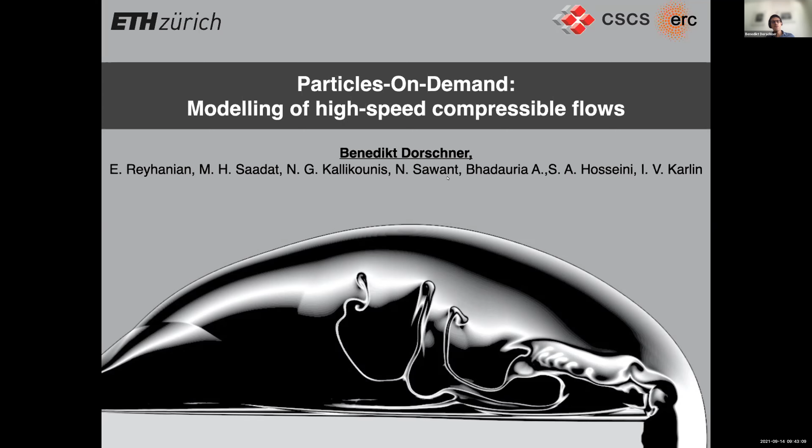So as you mentioned, today I want to talk to you a bit about how we can model high-speed compressible flows using particles on demand. This is under the scope of an ERC project led by Ilya. And what I will be showing you today is not just my work, but has been contributed by many PhD students, as listed here, also postdocs. Yeah. So let me start by giving you a bit of an overview.

I think we can now all agree that LBM really has developed into a versatile computational method, ranging from turbulent flows, where with the development of more sophisticated collision operators, we really were able to extend the range of attainable Reynolds numbers that we can look at and really have a predictive tool. The same applies in the multi-phase flow regime. I think there also LBM has really developed into a tool which can be used to not just validate, but also really understand and analyze complex flows.

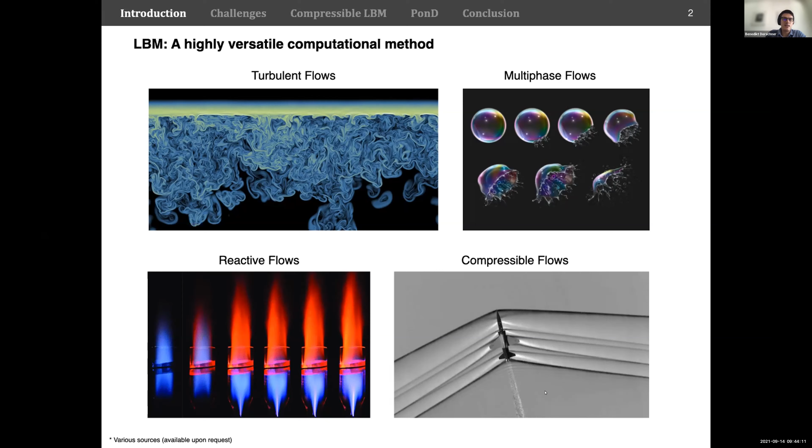Another area where I'm recently becoming interested is reactive flows, and also there I think we can make a valuable contribution. However, now the talk is about compressible flows, and I think particularly in recent years there's been a lot of developments in how we can use LBM also in this regime. And here I want to show you the range of Mach numbers by this arrow that you can see, and I think so far we have been conquering somehow the far left side. So we can do incompressible turbulence, and there's also scope for using LBM in the transonic regime and also in the supersonic regime, but this is still limited to the mild supersonic regime, so still quite low Mach numbers.

And today I wanted to talk to you basically about the full range of Mach numbers. And in particular, there's a lot of interest these days in hypersonic flight. So there we, of course, then need a tool to accurately predict hypersonic flow. This somewhere starts around Mach 5 and then leads to hypervelocity flow. And there's very interesting applications such as atmospheric re-entry, which ranges about Mach numbers 20, 30, something like that. But even further, if you go in Mach up to 1000 and beyond, you have interesting applications in astrophysics. So there's astrophysical jets that you want to predict numerically, understand and analyze.

But now let's talk a bit about the problem that we are having in really solving compressible high-speed flows. And this starts by looking at the Boltzmann equation in its continuous form. And here you can see it's continuous in velocity space, and we have our Maxwell-Boltzmann distribution function. We know that if we do a Chapman-Enskog analysis, we can recover the fully compressible Fourier-Navier-Stokes equations by considering these 5 moments that I'm showing here. So that is our conservation laws, the pressure tensor, heat flux tensor, and the 4th order moment that we need to consider in order to get the fully compressible Navier-Stokes equations.

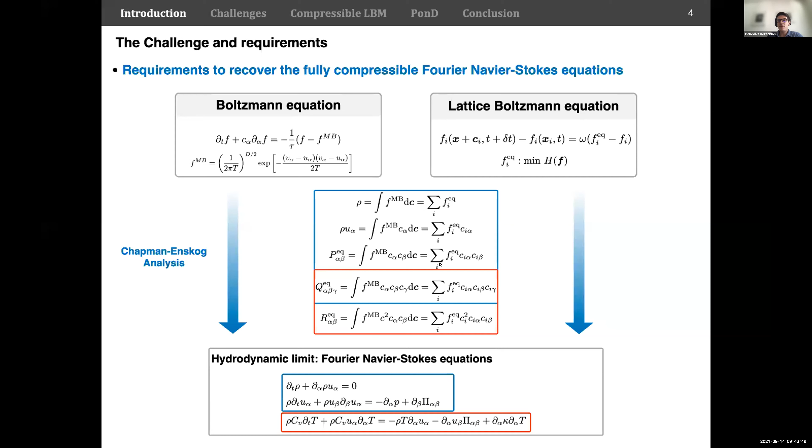Now that becomes a bit tricky if you look at the discrete setting, right? So this is the lattice Boltzmann equation, which can be viewed as a discrete version of the Boltzmann equation. So here we also discretize the velocity space, denoted by Ci, and then of course we also need to construct somehow a discrete version of the equilibrium distribution function. And the requirement to really get to the fully compressible Fourier-Navier-Stokes equations is that we have to recover these 5 moments correctly. And this becomes, of course, a bit tricky if you only have a finite set available. And it becomes clear if you already look at our standard lattices.

So here in one dimension is D1Q3. So this is a particle's velocity at rest, -1 and +1. And of course, if you go to higher dimensions, you can take the tensor product and you will end up with these lattices. But then, of course, if you take higher order moments, you can see that here, Ci cubed is going to be Ci. And this implies that the moments are going to be linearly dependent. Thus, we cannot capture all the moments that we previously said that we need to recover in order to go to high speed flows.

And you can somehow quantify this error that you're committing by looking at the deviations from the discrete moments to the continuous Maxwell-Boltzmann counterparts. Here I show some specific errors. They of course depend a bit on the choice of the equilibria, but the main structure remains very similar. In particular, you have these errors in the Q moment and in the R moment, or the 3rd order moment and the 4th order moment.

If you look now here, you have a term which is linear in the velocity and cubic in the velocity. Then you can say, okay, let's fix a temperature that will kill the linear term. So a fixed reference temperature here at 1/3 will nullify this term, but you're still left with a term which is cubic in velocity. And similar considerations also apply to the 4th order moment. And thus you can somehow say that these errors will only be negligible if you have vanishing flow velocity due to the cubic term here, and a fixed reference temperature T0.

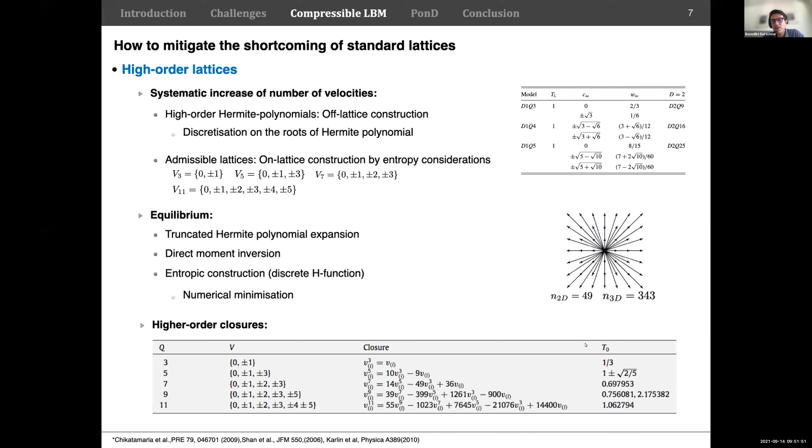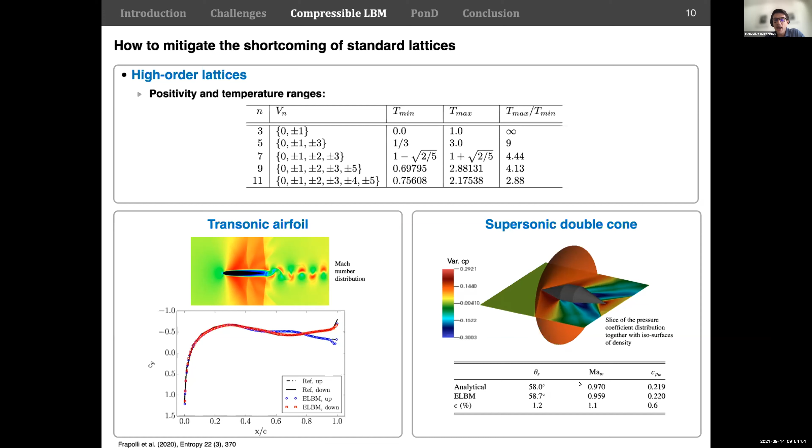He also did supersonic flow simulations, here shown exemplarily with this supersonic double cone. And again, we could compare it with an analytical solution. And you can see that even with quite coarse resolution, you were able to capture everything quite accurately within an error of 1%. So you can do something, but as I mentioned earlier, now we have to see what we can do.

So higher order lattices work. They can increase the range of attainable Mach number. It's a slow increase though. And actually the temperature range decreases with an increasing number of velocities. So that somehow questions if this alone is a path towards very large Mach numbers.

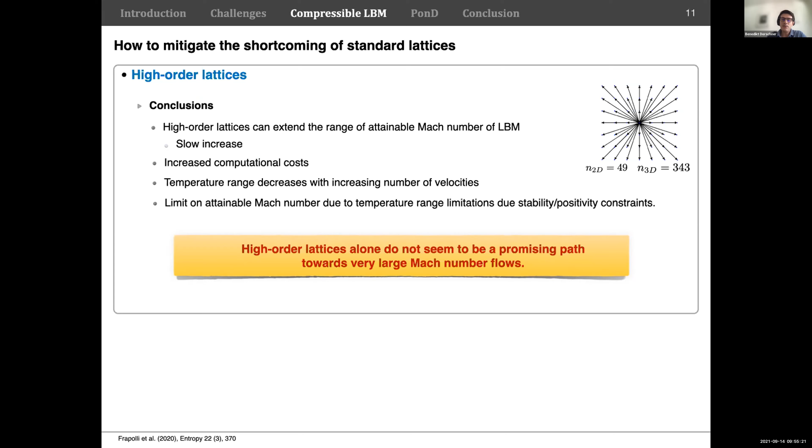Now, as I mentioned earlier, you can say, okay, let's ditch higher order lattices and let's stick to standard lattices and then correct the error terms in the hydrodynamic limit directly in the kinetic equations. And here I show you again the errors that we are committing, just to remind. And now we've been working on that, which is called an extended lattice Boltzmann method. And this is basically aiming to correct these errors.

So you can do this by realizing that you can actually correct these errors when you impose a different pressure tensor. And this is now not just the equilibrium pressure tensor that we usually have, but also takes into account the derivative of the deviation of the third order moment. And you can impose that by moment inversion is one way, or you can write it, as I show here, more compactly as a product form equilibrium, where it's a product of these triplets here. So that's one part for the third order moment.

You also have to look at the fourth order moment and the heat flux itself. And here you can also impose it directly, in the sense that here we look at the moments of the Maxwell-Boltzmann energy distribution functions, and use a second population in order to impose that. And here you can realize that you can generate these moments with these operators as shown here.

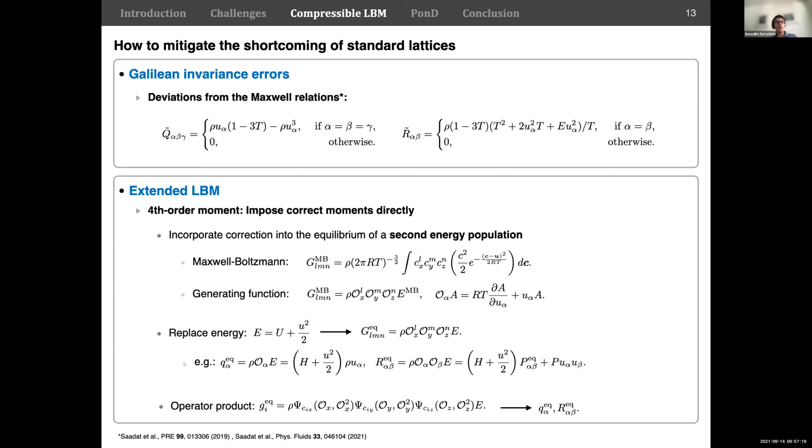Now, that this actually works. I want to show you very briefly a simulation of Hossein Saadat, who actually will have a talk later on and discuss this in a bit more detail. And this was the simulation of decaying, compressible, homogeneous isotropic turbulence. So Reynolds number is 175 and turbulent Mach of roughly

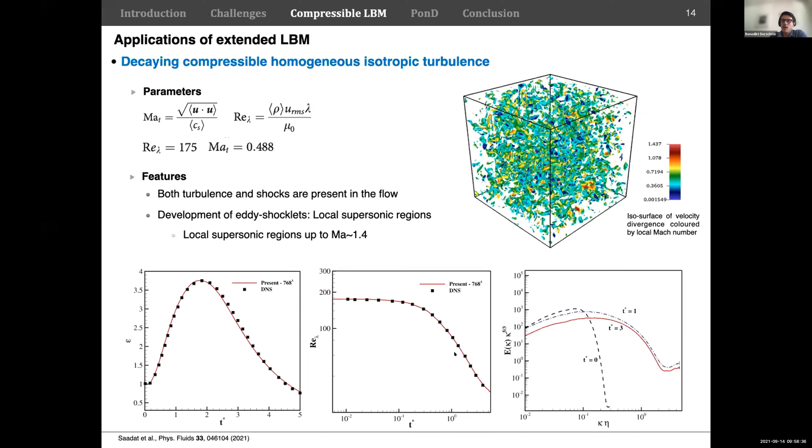Now, what I've shown you so far, these schemes are very comfortable in the regime that I've been showing previously. So this is in the range of transonic, mild supersonic flows. I promised you to go a bit further to look at the upper range, and for this, I will introduce particles on demand.

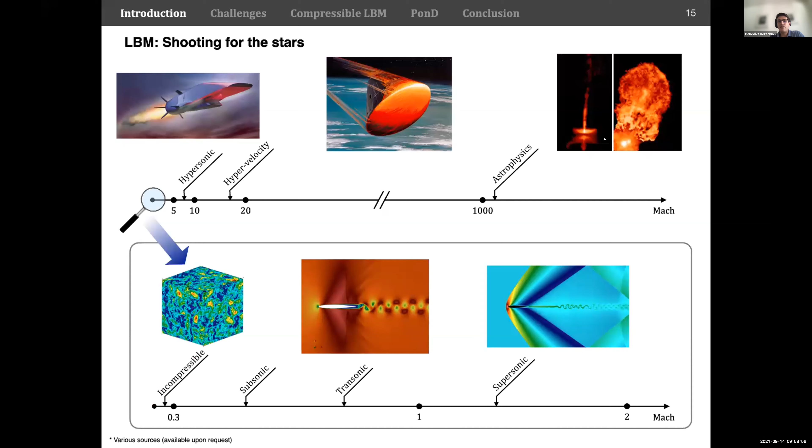That means what this local reference frame actually implies is that the populations only see macroscopic quantities with respect to the local gauge. That means your equilibrium, for example, will be evaluated at zero velocity and the reference temperature directly, basically leading to just a density dependence times the weights. And it also implies if you take the moments now with these scaled and shifted velocities with respect to some reference frame, you will actually recover all the moments that you need in order to recover fully compressible Navier-Stokes. So all the troubles that we had before will vanish once I'm in the local reference frame.

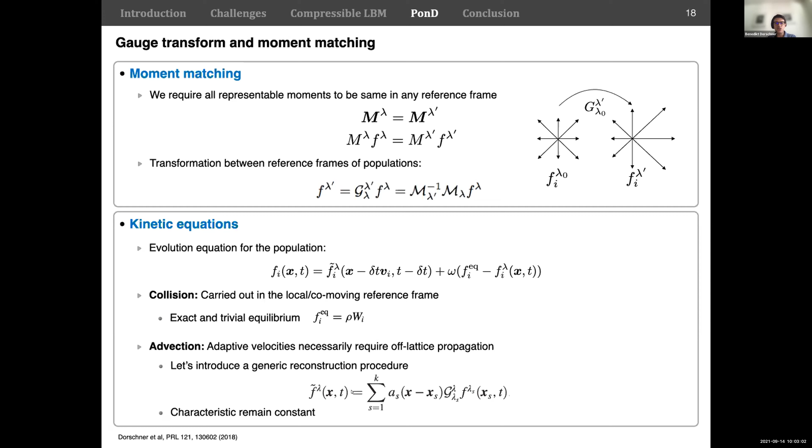So now the question is, how do we get this local reference frame? We know that once we are in the local reference frame, everything is well behaved and works well. The question is how to get there. And we get there by an iterative predictor-corrector search. Basically, we initialize the system with previous time step values.

We can thus compute our discrete velocities, do an off-lattice propagation of sorts, compute macroscopic fields, because they are now new, because you have distributed your mass, momentum, energy, and so on, which then necessarily leads to a new reference frame. And then you have to check if you have converged, and by converged I mean, did the reference frame change? If it has changed, you keep iterating until it converges.

And once it converges, you're actually in the local reference frame, and you can carry out your collision and the next time step. Here's a note on the convergence of this whole thing. It's a fast convergence in the sense that typically we don't require much more than one iteration in regions where you have smooth flow, and only in regions where you have large gradients, discontinuities, will you have iterations which go beyond one. But still small, they range between 4, 5, 6, something around that.

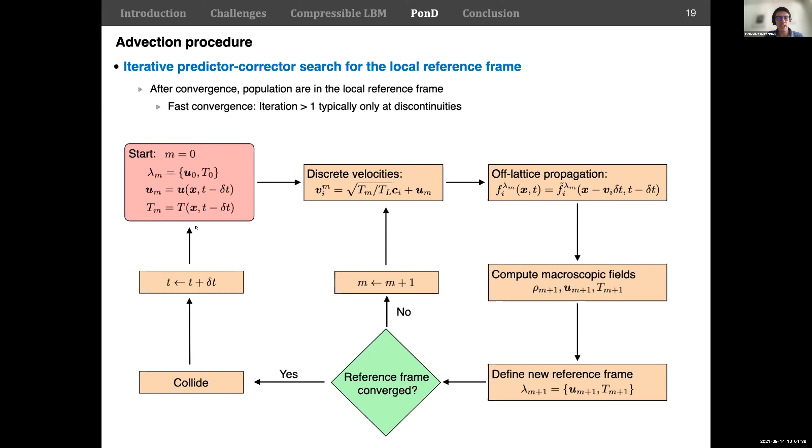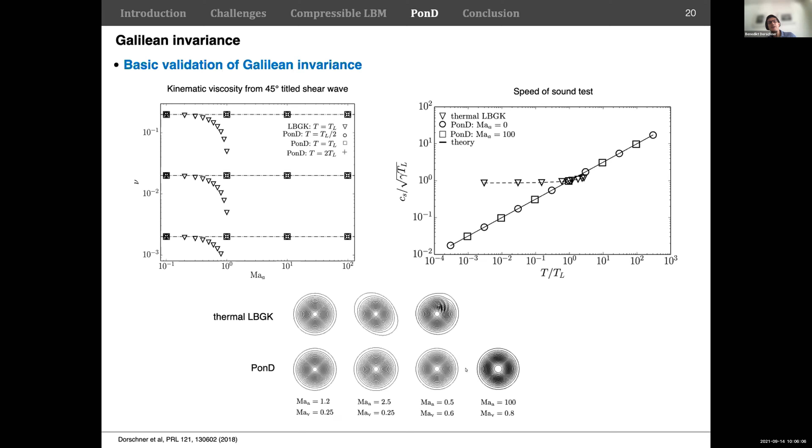Previously, I was a bit vague about the choice of the off-lattice propagation scheme. And that was for a reason, because there are many different methods that you can use, and you can more or less generically incorporate POND in them. Previously, we've been using a semi-Lagrangian advection scheme, which works, but also has some drawbacks, especially if you use Lagrange polynomials or something like that. I encourage you to check out Nikos Kallikounis' talk. He will talk about finite volume schemes, where the main benefit is that you rigorously conserve mass. And on the plus side, of course, you can get away with far fewer velocities.

But you can also use finite difference schemes. You can use hybrid schemes, LBM-POND. You can snap them onto the lattice if the flow actually allows that. There are also other approximate versions like regularizations and so on. In terms of the reconstructions themselves, we've also been playing with moment-conserving interpolations that we borrowed from the vortex particle community, but also higher-order WENO schemes, limiters, and so on. Those really help if you go to large Mach numbers with a strong discontinuity. And for those schemes, Ehsan will also talk, I think in the next talk, a bit more in detail on the numerics.

Okay, so now one other thing to note is that Pond is quite universal in the sense that we can use all the different models that we have already developed in LBM within Pond. So we can use our two-population models, quasi-equilibrium models. You can also use your favorite multi-phase model, multi-speed models for non-equilibrium flows, and even detonation simulations are now possible.

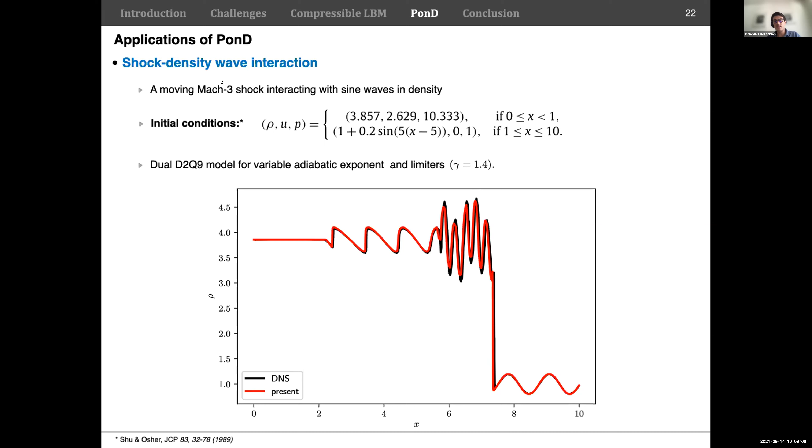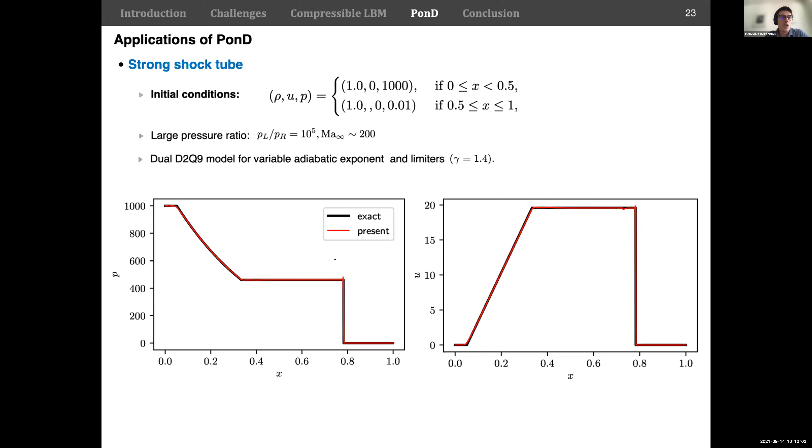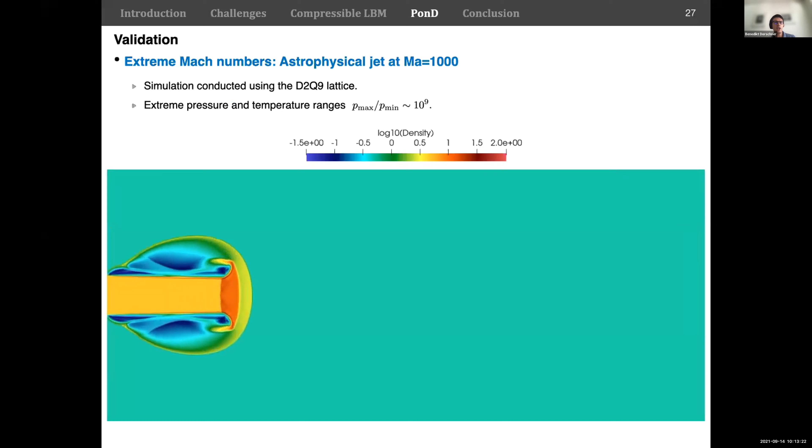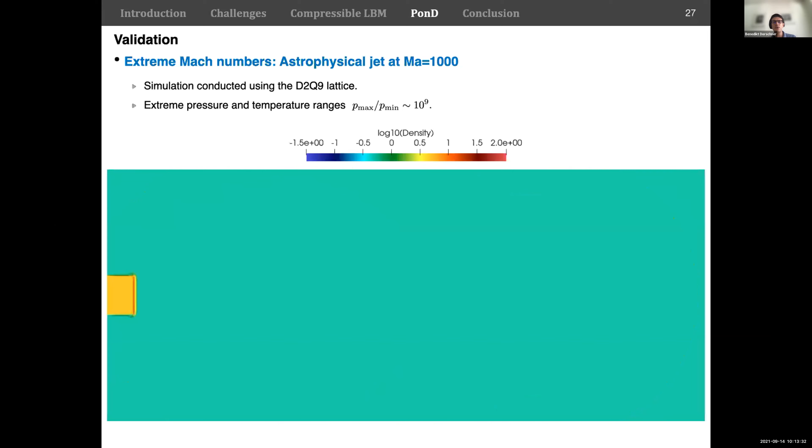Last but not least, I promised you the full range, and here I want to show you an astrophysical jet at a very large Mach number. So you have a jet which comes in at Mach number 1000. And this was a simulation still using 9 speeds and 2 populations. It's extreme in the sense that you have an extreme pressure ratio. So the ratio goes up to 9 orders of magnitude difference in both pressure and also temperature.

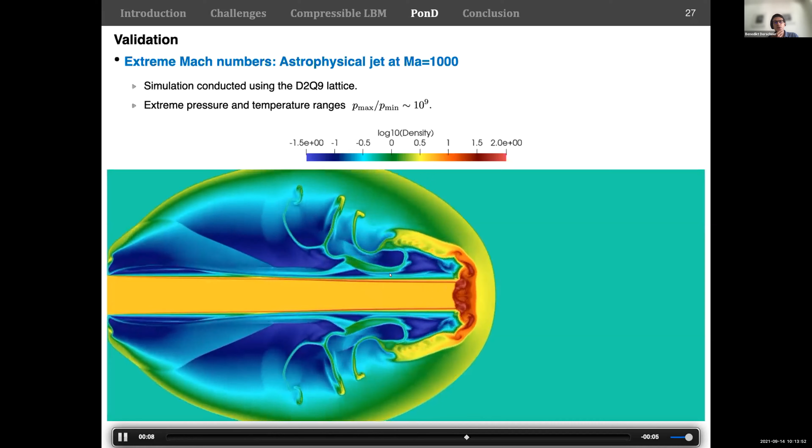And here in this movie, I show you the evolution of the logarithmic density. I will not go too much in detail there. I think Esan will talk a bit more about what you can actually see here. But this is just to say that Pond also works for extreme Mach number flows.

That comes to the end of my talk now. So what I was trying to convey today is a couple of ways how you can do compressible flows with LBM or kinetic schemes in general. If you look at higher order lattices, correction models, they are very accurate, very efficient, but they're somehow limited in the range they can achieve. So you are somehow on the low Mach number end of the spectrum. And you can use Pond to eliminate these Galilean invariants and actually capture the full range in Mach numbers.

And this, of course, opens up very interesting perspectives. We can now look at things like atmospheric reentry problems. Of course, we still have a lot to do in order to capture those accurately, but at least there's a path towards this now. Also interesting applications like the supersonic parachutes that you will find for Mars landings, for example. This is something which interests me at the moment, in particular because we can now use all the knowledge that we already have from the lattice Boltzmann in terms of fluid structure interaction and so on directly in Pond, and then basically tackle these types of applications with that.

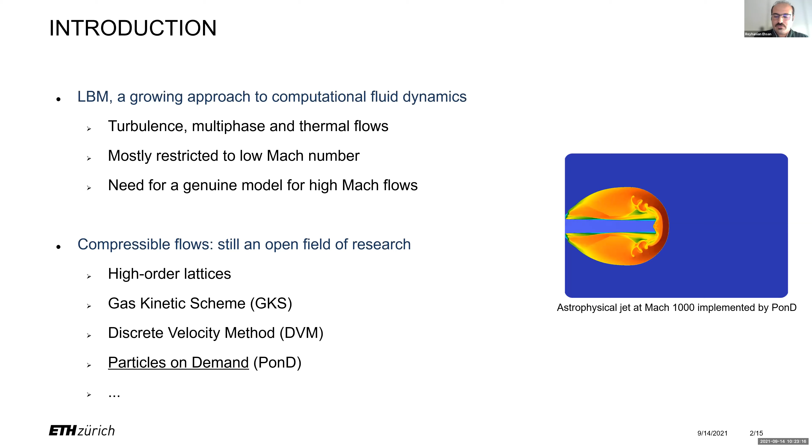Within the framework of kinetic theory, there have been some methods developed so far, all with some advantages and disadvantages of their own. But as a recent and novel method, I have chosen the particles on demand method for my research. And today I would like to show some applications of particles on demand on high Mach number flows. We had a very comprehensive talk on the introduction of PonD, but a very brief introduction on my side.

In the PonD framework, the conventional discrete velocities known as the lattice are rescaled with the square root of the local temperature of the flow. And this will get rid of the temperature restriction that we have in LBM. And then those velocities are shifted by the local velocity of the flow. And this will bring us the Galilean invariance that we are missing in lattice Boltzmann methods.

Usually in lattice Boltzmann methods, one way to get the equilibrium is to use the truncated polynomial in velocity, and that is the main reason that these schemes are not Galilean invariant. But here we have an exact equilibrium depending only on the density and the weights, and this will bring us an error-free collision. We also realize that the PonD scheme reduces to lattice Boltzmann if the temperature is chosen as the lattice temperature, and if the global reference frame is set to 0.

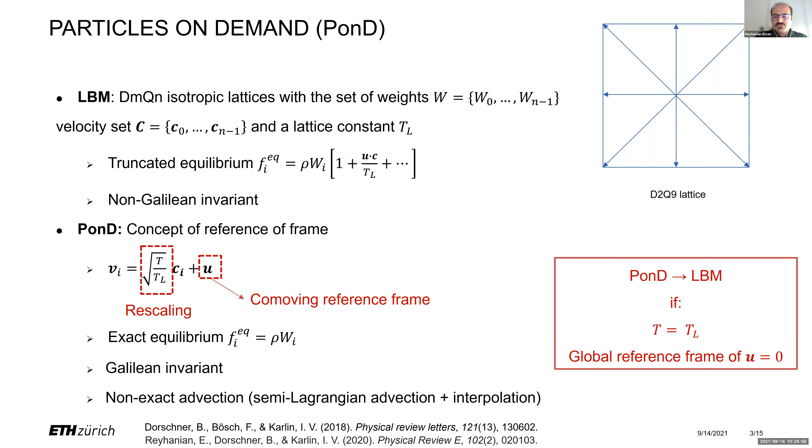However, these discrete velocities are no longer integers and space-filling, so the simple point-to-point streaming that we have in lattice Boltzmann is no longer the case here, and we have to use different methods. For example, I use the semi-Lagrangian advection, which requires interpolation. If we want to update the information at the monitoring point X, we travel back in time through the characteristics to the departure point, and this departure point will not necessarily be a node point. So some collocation points will be used to interpolate for the desired information.

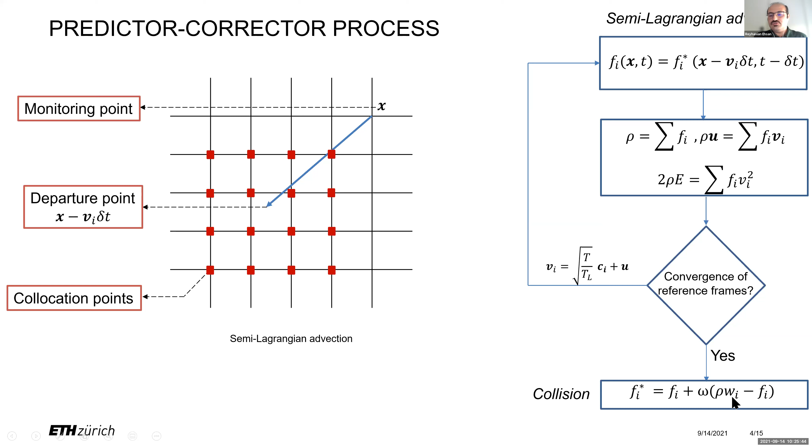After that, the macroscopic values will be evaluated, and we iterate this process until the convergence of reference frames is achieved. And at that point, we are sure that we are at the co-moving reference frame where we can use the exact equilibrium function in the collision.

And this is the big picture. Now we want to go into the little details as to how we can do all these reconstructions and how they would affect our simulation.

So the reconstruction is simply the interpolation of the transformed particles. We want to transform the populations before advecting them in order to be consistent. So they must be transformed to the reference frame of the monitoring point that we want to advect these particles to. So after transforming those, we want to interpolate these transformed particles on all these collocation points.

And for the interpolation kernel, there are different choices in the literature which have been extensively used before. For example, one can use a moment conserving interpolation, where a finite number of moments of the interpolated quantity is conserved during this interpolation. One can use the simple classic Lagrange polynomials, which can overlap with this moment conserving one under some circumstances. And also we have B-splines, which are smooth functions, and so on. So there are so many choices.

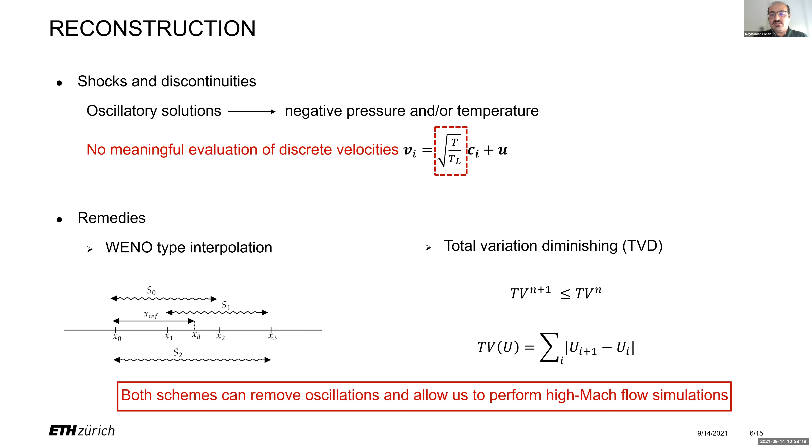So to overcome that, we use two types of remedies. One is the WENO interpolation, where we choose between the sub-stencils. And the other one is to use the total variation diminishing concept, where the total variation of the solution remains finite and not increasing in time.

So the WENO scheme is very well-known, but just a brief introduction: the main stencil is broken into different sub-stencils, each assigned a weight. If a sub-stencil includes a discontinuity, then the weight of that sub-stencil is negligible. And finally, the convex combination of solutions at each of the sub-stencils guarantees an oscillationless final solution. This is one way that we can deal with shocks and discontinuities.

The other way that we have used is the concept of TVD, and we apply that to an improved, well-known B-spline known as the K3 B-spline. All B-splines are second-order accurate, but we can improve those and have third-order accuracy. And as I said before, B-splines are smooth functions. They have a continuous derivative.

For example, if we compare this B-spline to the fourth-order Lagrange polynomial, you can see its smoothness and continuous derivative in its range. And this brings us a very good mass-conserving property, as we can see in our simulations. So with that in mind, we apply TVD on top of this interpolation kernel to have oscillationless solutions, because as we can see here, we still have negative values, which will lead to oscillatory solutions.

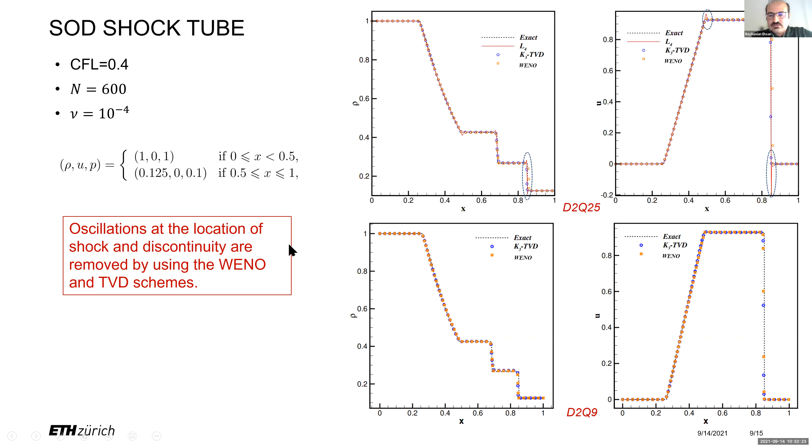And the same explanation goes for the non-velocities as well, where we see that oscillations have been removed from these plots. So I go a little bit further. I show the Lax shock tube problem. The CFL is the same number, 0.4, even though I have compared with lower CFL numbers. So for example, if you use the fourth order Lagrange polynomial, this will not work in these problems. And this is not even a very extreme case.

So here again, we see that for 25 and 9 velocities, the location of the shock and discontinuity have been captured well. It is in nice agreement with the exact solution. And more importantly, the oscillations have been successfully removed from the solution.

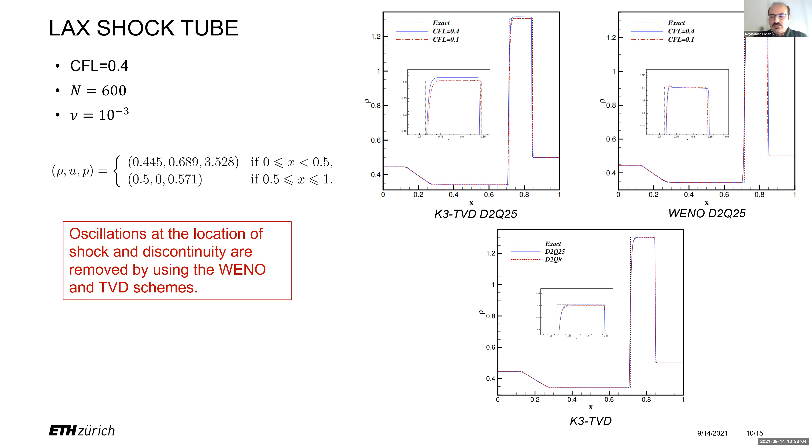So moving on, this is the last 1D case that I would like to show. This is the strong shock tube as shown by Benedikt. This problem is strong in the sense that it features a Mach number of 198. We fix the CFL to 0.1 here. We use 9 velocities, and we see that the TVD scheme has a very good performance in this problem. So this is the density and temperature field, and we see that the temperature ratio is 10 to the 5, which is far from the performance range of, let's say, lattice Boltzmann methods.

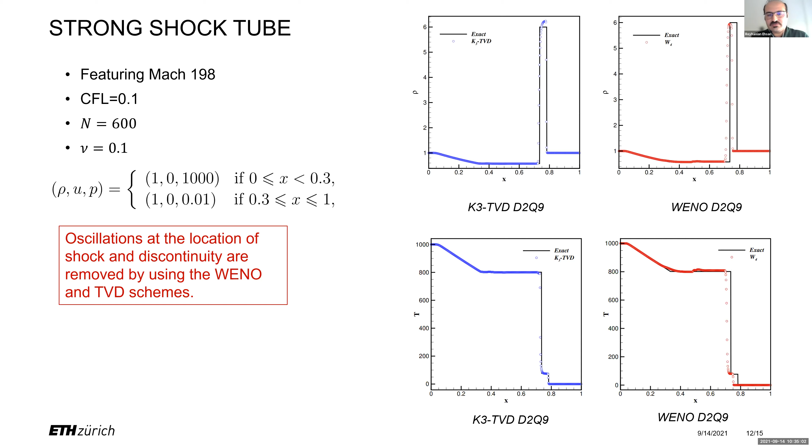However, on the other hand, the WENO scheme has a slightly poorer performance with respect to the TVD, and I believe that this is because of the mass conservation problem, because as we know, semi-Lagrangian schemes are in general not mass conservative. And as I said before, these B-splines have a very good mass conserving property, which leads to a very good performance even in these extreme cases. But the WENO schemes do not have this property, and that is why they might diverge a little bit in very extreme cases. But overall, the performance of WENO has been quite good, actually.

And for the last test case, the astrophysical jet, which was shown by Dr. Dorschner. Here the astrophysical jet refers to very high speed gas flows, which are observed by the Hubble telescope. And we do not consider the effect of radiative cooling, which is actually the case in reality. It is conventional to refer to the Mach number with respect to the cold jet, and here the Mach number is 1000. We fix the CFL to 0.1. We have a different value of gamma here.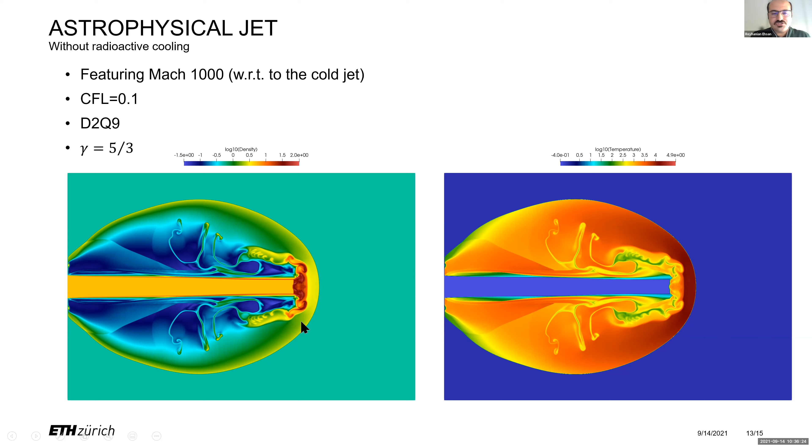So we see the density and the temperature contours here, other than the stable solutions, which is actually very important in these test cases, because we have a huge amount of kinetic energy, which can simply lead to negative values of temperature, which is a classic problem in high-speed gases. We see that the general features of a supersonic jet, for example the bow shock and the instabilities of the jet tip, are captured. So with that, I would like to wrap up my presentation.

So in conclusion, the PonD method uses a set of discrete velocities, and with that, we are given Galilean invariance, which we need for high-speed simulations. But of course, we need to augment this method with some shock capturing schemes, so that we are able to simulate high Mach number flows. This is still ongoing research, and we are looking forward to extending the application of this model to 3D applications. Thank you very much, and I'm open to questions.

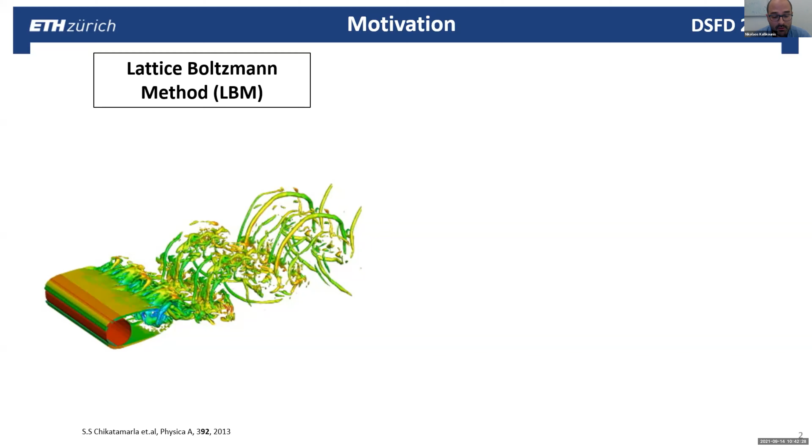The lattice Boltzmann method is an accurate and reliable CFD solver. The simple streaming step along the lattice links and the local collision step make LBM a very efficient method, competing with commercial and other well-established CFD methods. However, at the same time, the lattice puts severe constraints on the attainable flow velocities and temperature ranges. To remedy these constraints, the particles on demand method, or PonD in short, allows the particles' velocities to be guided by the physics of the flow. Experience with PonD has shown that the operating windows of the kinetic models can be extended considerably, and high Mach compressible flows with large temperature ratios are now possible.

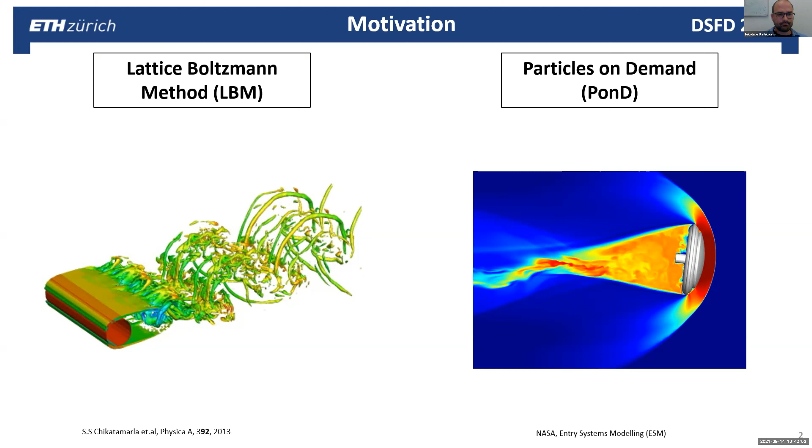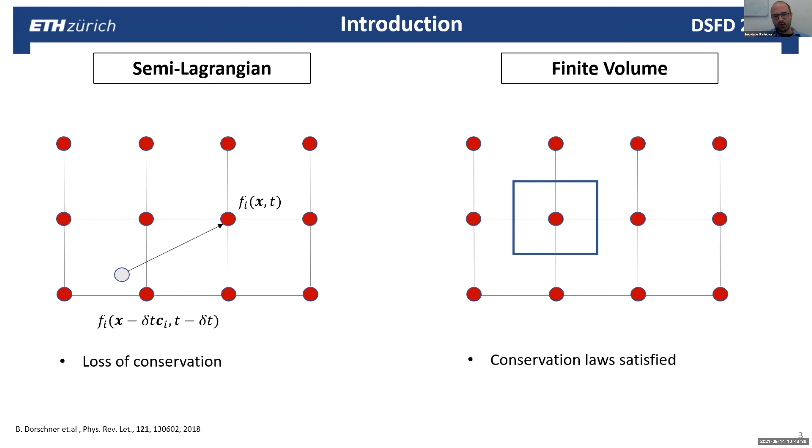As we already saw, most of the previous works with PonD were designed with a semi-Lagrangian numerical scheme. And although this method is simple and offers several advantages, the main drawback is that it does not easily allow mass, momentum and energy conservation. In this work, we wish to address this problem by exploring a finite volume discretization scheme. With this viewpoint, our domain now consists of a set of control volumes and cell faces. The key element in this method is the calculation of the fluxes which pass through the cell faces. And since the flux that enters a given cell is identical to that leaving the adjacent volume, these methods are in general conservative.

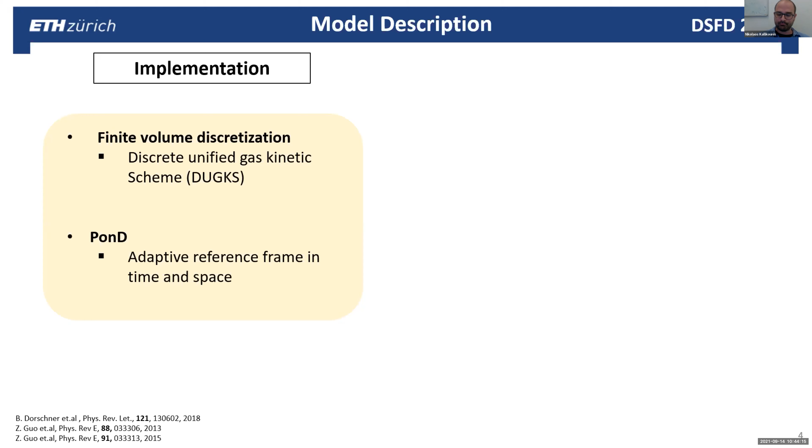So in this work, we will follow the finite volume implementation of the discrete unified gas kinetic scheme, or DUGKS in short. In addition to the conservative properties of this method, an important characteristic is that the time step is not restricted by the collision time, and relatively large CFL numbers can be used for the simulation. So our target is to reformulate the DUGKS algorithm within a framework of adaptive reference frames in space and time. The underlying kinetic model consists of the two population model. The density and the momentum are conserved from the f populations, and the second population, the g's, are designed to carry the excess internal energy and to modulate the adiabatic exponent.

Again, a brief short overview about PonD. So the main idea is that to construct discrete velocities, we need to select a reference frame, and we define it using a reference velocity and the reference temperature. In traditional LB models, the reference frame is assumed to be constant across the simulation domain, zero velocity and scaled with the lattice temperature. In PonD, however, each point in space and time uses its own reference frame, which is characterized by the local flow velocity and temperature, and we term it as the co-moving reference frame.

And the key advantage of this approach is that the equilibrium populations in the co-moving reference frame become exact and they do not depend on the velocity. For the actual implementation of PonD, the first task is to relate populations at different reference frames. And to accomplish this, we will use the one-to-one relation between the population and its vector of moments, and also that the moments are independent of the reference frame.

The second element that needs to be addressed for the realization of PonD is an iterative scheme, typically a predictor-corrector loop that breaks the implicitness. And the reason for this implicitness is that the particle velocities depend on the local flow velocity, which is not known a priori.

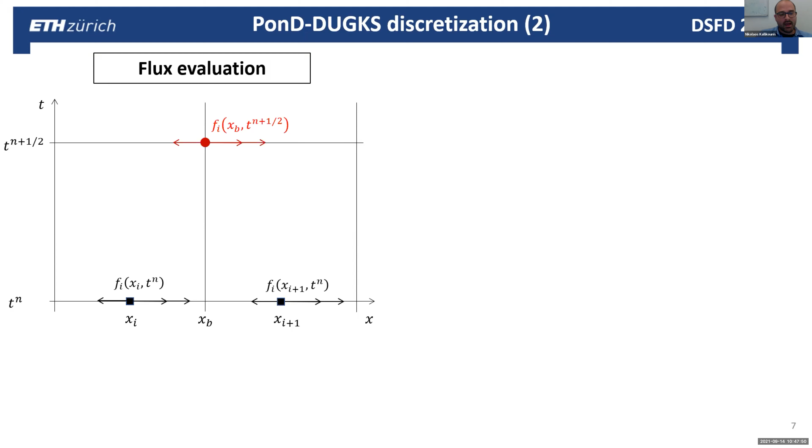Let's focus on this simplified diagram. The horizontal axis represents the space, with the solid squares showing the cell centers. At time step n, we know the populations at the centers, and what we need in order to evaluate the fluxes are the populations at the faces of the cells, at time step n plus a half. And to compute these populations, we essentially apply a half time step LB step, and to perform this explicitly, we again use the variable transformation as shown by the populations with the overbar.

The flux evaluation can be summarized in the following steps. So first, compute the transformed populations at the cell centers and the spatial gradients. And for high Mach flows with discontinuities, slope limiters such as the Van Leer limiter are used for the gradient computation. We then perform the PonD streaming step. So the reference frame is initialized with the flow fields from the previous time step, and we calculate the departure point. Using the cell center data and the spatial gradients, we can linearly reconstruct the populations at the departure point.

And with the populations calculated, the flow fields at the cell faces are now evaluated, and the loop is repeated until the reference frame converges. And at the end of this step, we use the transformation to obtain the f populations and evaluate the fluxes. We should also note that at this point, if instead of the PonD iterations, we use a constant reference frame and just a linear reconstruction of the departure point, we also retrieve the original DUGKS algorithm.

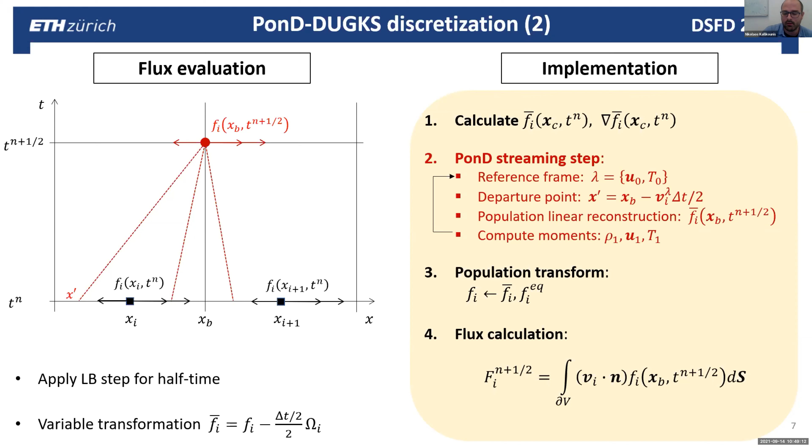So now we can show an overview of the PonD-DUGKS algorithm, identifying the following phases. At the beginning of the time step, we have the populations and the flow fields defined at the cell centers. With this input, we can calculate the transformed populations, the f bar, and the spatial gradients at each cell center. The second phase consists of the flux evaluation at every cell face. And this is the phase where the PonD iterations take place. And at the final phase, we update the populations at each cell center using the fluxes from the previous phase and calculate the flow fields.

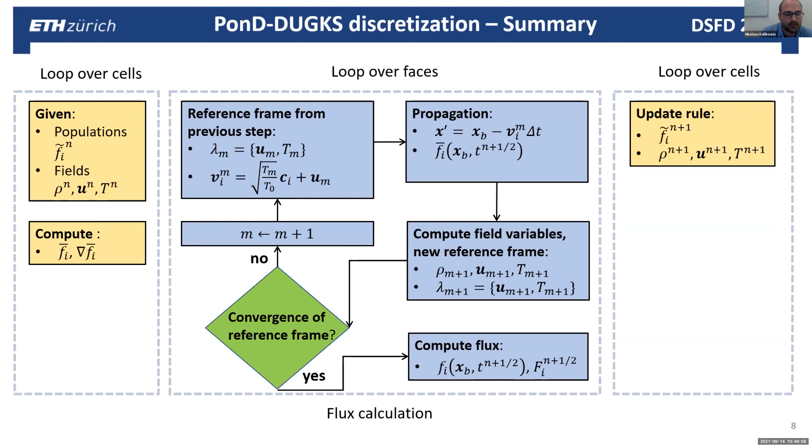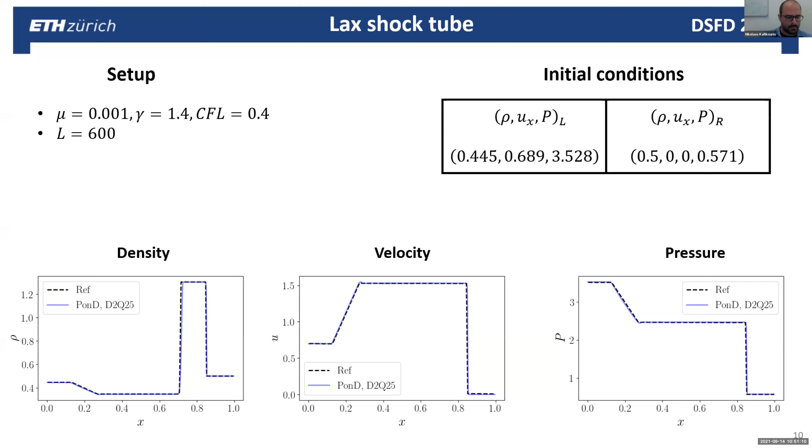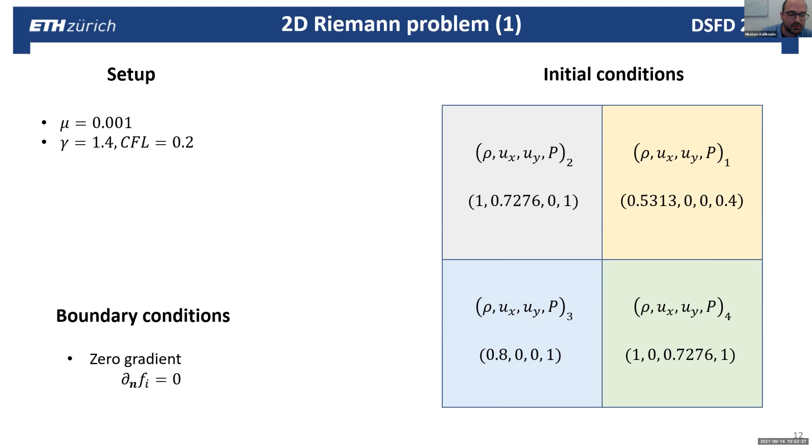The next problem to study is a 2D Riemann problem, which is also a benchmark test case for compressible solvers. The model consists of the D2Q9 set with a CFL number set to 0.2. The simulation is initialized by dividing the domain into 4 quadrants, each of which is set to constant values of flow fields, as shown in the configuration on the right. For boundary conditions, we apply 0 gradient at the populations at each boundary of the domain. And what we expect to see from this setup are emanating shock waves from the interfaces, propagating towards the upper right corner, and the development of small structures due to the interaction of the waves near the middle.

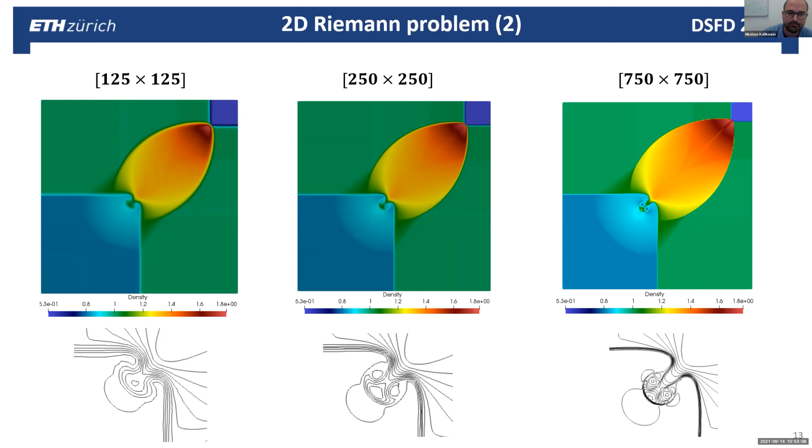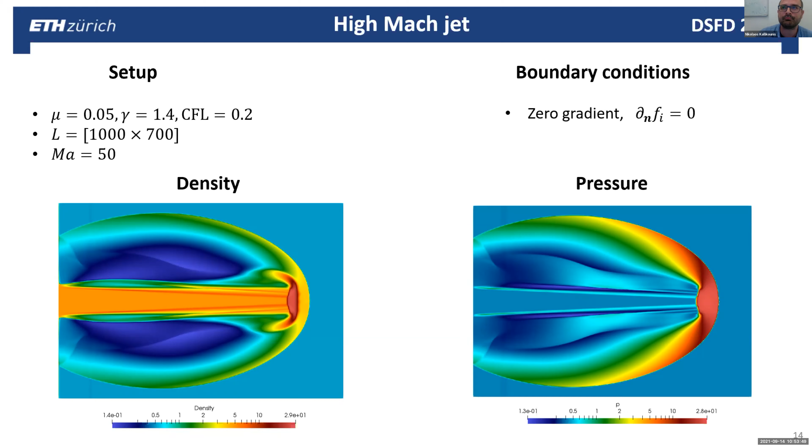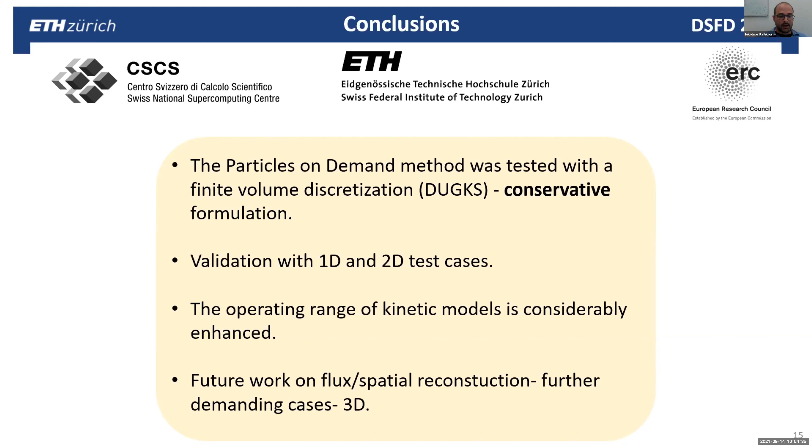In conclusion, the particles on demand method was tested with a finite volume discretization, in particular the discrete unified gas kinetic scheme, which is a conservative formulation. The PonD-DUGKS scheme was validated with a series of 1D and 2D problems, showing a very good agreement with the benchmarks. In general, using an adaptive reference frame formulation in DUGKS shows a considerable improvement of the operating range of the kinetic models, similar to what we have seen with other PonD methods. And finally, more work will be pursued on the flux evaluation and the spatial reconstruction, further testing on more demanding cases and also 3D problems.

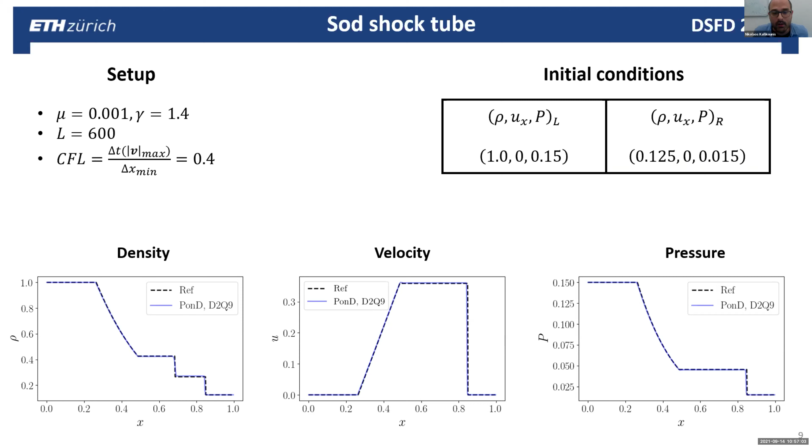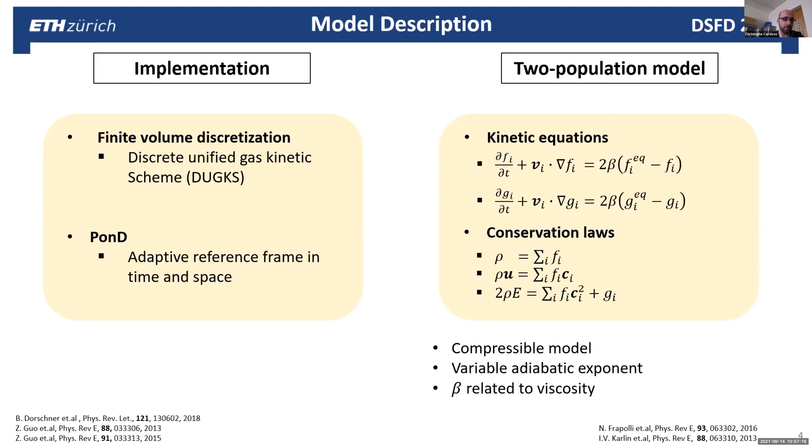Yes, yes. Yeah, because if you use only one population, since you do not have the right third order moment, you will have a mismatch on the temperature field. Sorry, everywhere we use the two population model. Yeah, but that's the trick, in fact, because if you were using one population, since you have been saying for like 3 talks that with the Q9 formulation it works, it doesn't work. You do not have the right third order moment. And this can be easily shown, in fact.

But in the co-moving reference frame, also the third moment is, so if you compute... Did you compute the deviation with respect to the third order moment, and did you show that the error is equal to machine precision? You can compute, yes, so the third moment and the fourth, so in the co-moving reference frame only, it is... I mean, this is extremely weird because we implemented it and we have issues on the temperature field, and we showed that it's because of the third order moment.

In fact, it's in the backup slides of my presentation of yesterday. This can be easily checked on ResearchGate. I just uploaded it. So you can also check our paper. So in the paper you use two populations. If you use two populations, that means that you're decoupling the resolution of mass and momentum equations from temperature. And for mass and momentum equations, you need up to second order moments for the convective fluxes.

So Q9 works. But if you want to do all the physics with Q9, then you need third order moments. And this doesn't work because you do not have enough moments with the Q9 formulation. You only have 9 moments because there is a direct bijection between the velocity space and the moment space. So, but you have a mistake in your thinking, because the whole concept of PonD, if you go on paper... No, but this is basic mathematics.

Did you compute by hand the third order moment in the co-moving reference frame, and did you show that you get the right one? Yes. So you can also... Which paper? Which third order moment? I want to see the paper. The multi-scale. No, multi-scale, you have 2 populations. Don't lie. No, but you can still see the equilibrium moments using the D2Q9 only there.